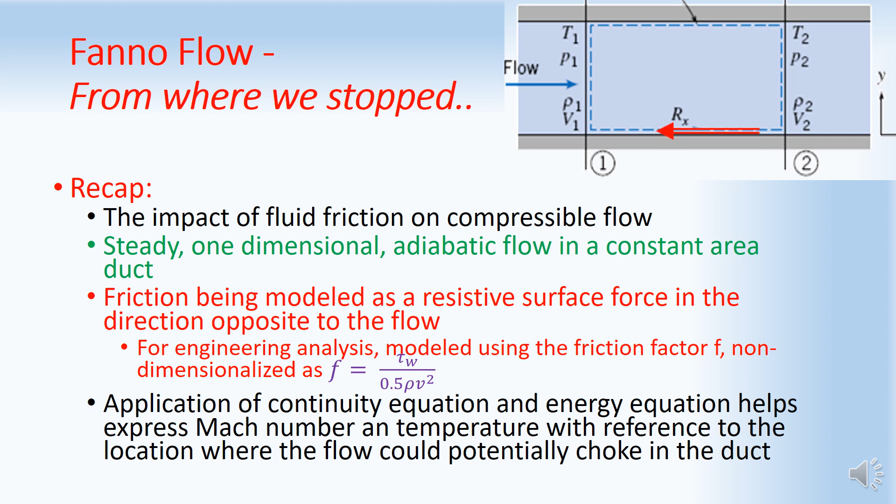We have also seen that the continuity and energy equations can be applied under these conditions, and we can use the conservation of mass and energy to arrive at relations for the ratios of temperature and static pressure. What we first did was to apply the energy equation, because we know that stagnation temperature is constant since we are considering an adiabatic case, and by the application of the energy equation we have derived the relation shown on the top, T2 by T1, that is the ratio of static temperature across the duct at sections 2 and 1.

And we have seen that it can be expressed as 2 plus gamma minus 1 M1 squared divided by 2 plus gamma minus 1 M2 squared. In fact, I guess we wrote that in a slightly different fashion in the class, as 1 plus gamma minus 1 by 2 M1 squared and 1 plus gamma minus 1 by 2 M2 squared, but you can note that it's the same expression.

Similarly, we have combined the energy equation with the continuity equation, and we have got a ratio for static pressure. This derivation also we have done in the class: the ratio of static pressures P2 by P1 is equal to M1 by M2 square root of T2 by T1, and combining the expression for T2 by T1, we can now write P2 by P1 is equal to M1 by M2 multiplied by the square root of the expression that we have for T2 by T1.

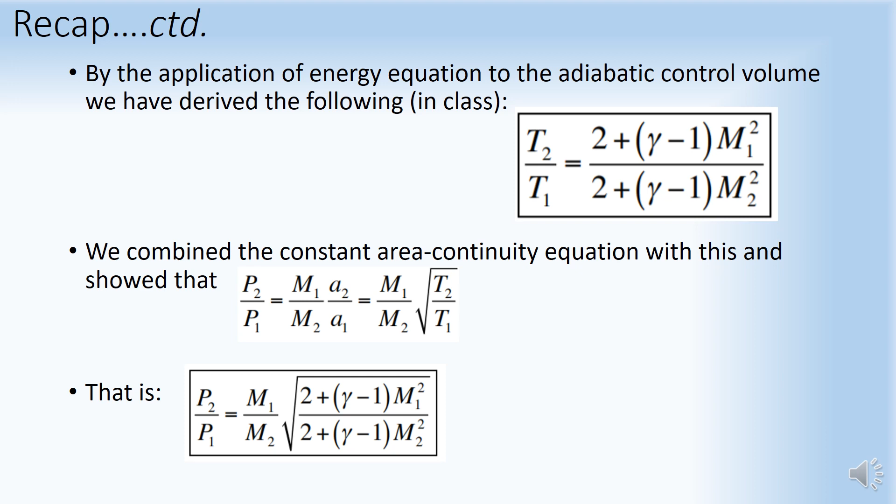We have also seen that, in a similar fashion as we did for Rayleigh flow, the ratios can be written with respect to a sonic reference condition. That is, if the length were long enough, the flow would choke at some point, and at that point, the sonic condition, the Mach number will be equal to 1. In the above expression, if we substitute M2 as 1

and the respective properties are marked by star, then we can write that T by T star is equal to gamma plus 1 divided by 2 plus gamma minus 1 M squared, which comes directly from the equation that we have written earlier. Similarly, a ratio for P by P star, which is equal to 1 by M square root of gamma plus 1 divided by 2 plus gamma minus 1 M squared.

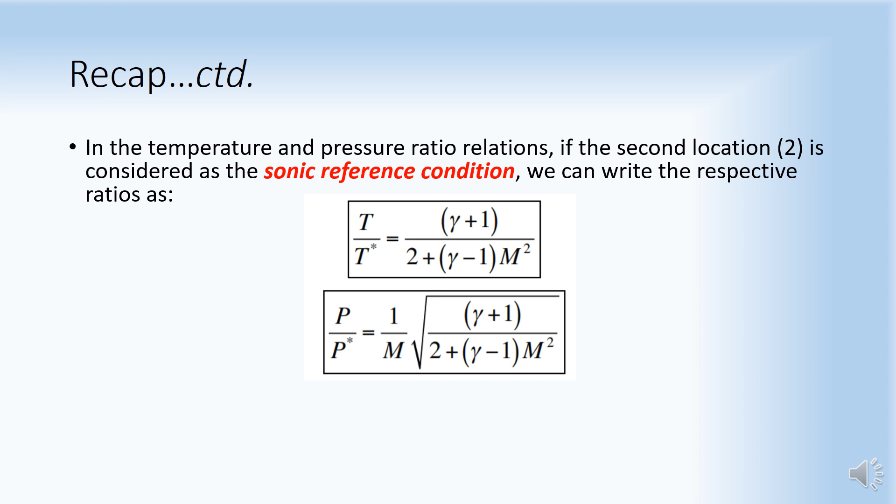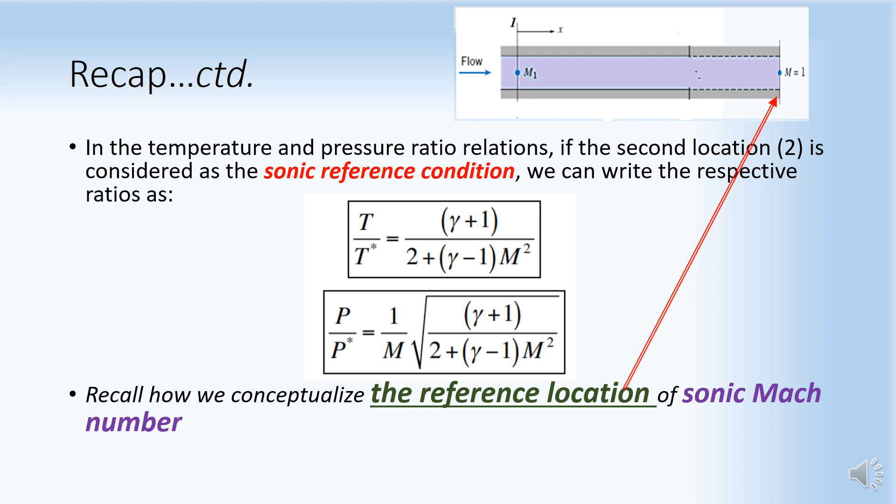So these two relations that we have written here, T by T star and P by P star, are ratios of local static pressure or local static temperature as the case may be to the respective values at the sonic conditions. So we are expressing these as a function of the local Mach number. So this much we have already done in the class, and considered the interpretation of the conceptual extension of the duct to L star. And what I want to highlight here is that this length is also referred to as maximum length, L max. I'll be explaining that more in another slide. So for now I'll just leave this part.

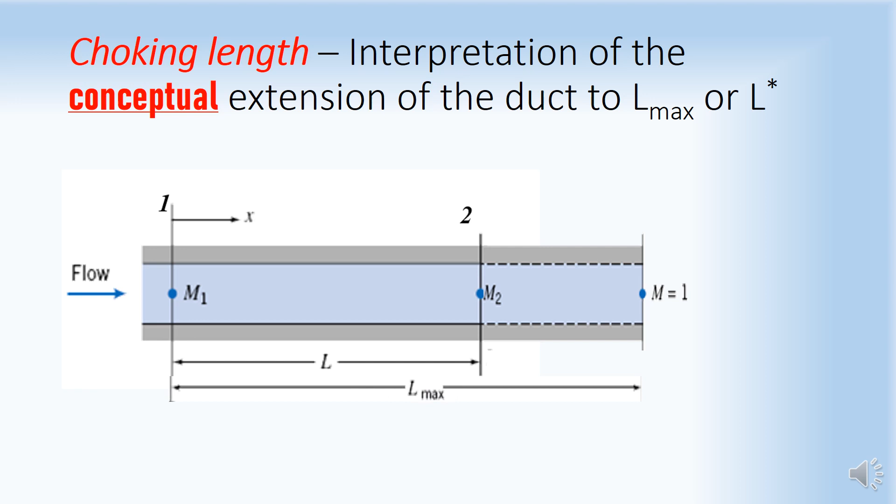We started in the class the application of momentum. So what we discussed so far was continuity and energy equation. We have also attempted application of the momentum equation. We started off with the finite form of momentum equation, the familiar form that we have been using, and we have modeled the surface force as the wall shear multiplied by the peripheral area pi D dl, and for the wall shear, we have it as pi D dl multiplied by half rho v squared into friction factor. And for a differential control volume, we have already written it as dp plus d of rho u squared being equal to minus 4 by D tau w dx.

This 4 by D, I don't remember whether we discussed that in the class, but if you do that yourself, you can see that the 4 by D on the right hand side comes due to the division of the area pi D dl by the cross sectional area pi D squared by 4. The pressure differential on the left hand side, dp etc., acts on the cross sectional area pi D squared by 4, whereas the shear force acts on the peripheral area pi D dl. So when we divide it by the cross sectional area, the term that will be left on the right hand side will be 4 by D, which comes as the ratio of the two areas.

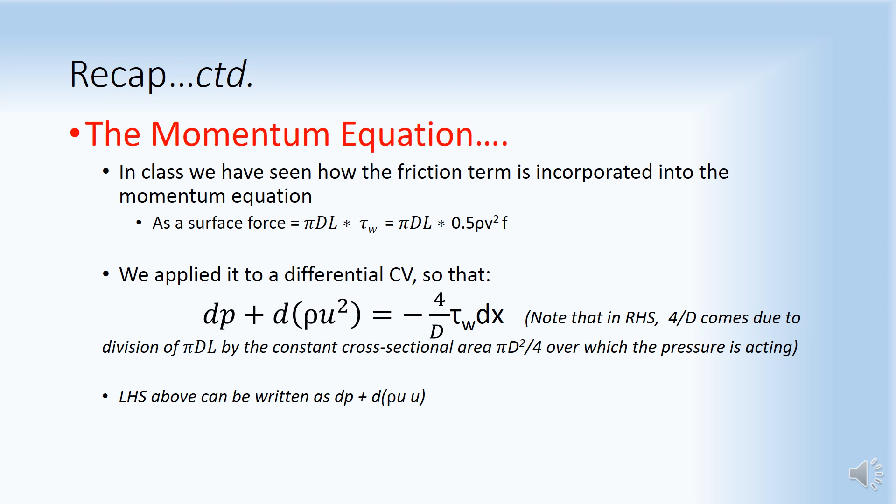Please also note that the left hand side here, dp plus d of rho u squared, can also be written as dp plus d of rho u multiplied by u, rho u being inside the bracket. The convenience of writing like this is when you expand the differential, rho u is, as we know, rho multiplied by velocity. Please note that in these slides I used u as velocity. Please bear with that. In fact, we have been using v for velocity. I missed the notation here, but please remember that we are using here u for velocity, not internal energy. So here rho u is nothing but rho v, which is constant, which means that d of rho u is going to be 0 because of continuity. The expression will simplify to dp plus rho u du is equal to minus 4 by D tau w dx. That's because d of rho u is equal to 0.

So the one which is highlighted here in red fonts is the differential form of momentum equation, and with some manipulation, relating velocity to Mach number, I have not done the entire derivation here. I am just jumping to the final expression. Instead of velocity, if you write Mach number, the whole expression gets converted to 2 of 1 minus M squared by gamma M squared, etc. That long expression that you have in the box.

Again, I apologize for mixing up the two notations u and v. Please be sure that in these slides, nowhere are we referring to internal energy. So wherever you see u, consider it as v. If you want, you can even correct it in your notes. It's v and not u. So don't confuse it with the internal energy. In this whole set of slides, we are not using internal energy at all. So wherever you see u, please take it as the velocity v.

Now, we have this expression marked in the box here, in which on the right hand side you have the all important parameter 4f dx by D, which is the representation of the force caused by friction. In fact, that's a non-dimensional parameter. Strictly speaking, the fluid friction or the wall friction may vary across the length of the duct. Please keep in mind that we are going to apply this across the length of the duct.

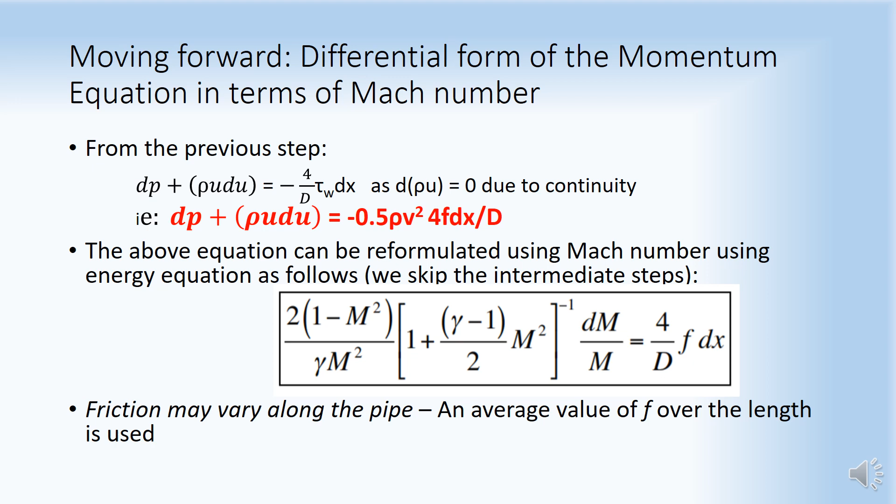In real applications, though fluid friction may vary along the length, it's quite usual to use an average value for f, that is an average friction factor over the length. So usually f will be considered constant and will be represented as an average value for a specified length of the duct.

Now this equation can be integrated, and the integration is usually done with the limits from entry. Keep in mind the flow is entering at some location into the duct and proceeding till the end of the length. Integration is done with the entry location being L equals 0 and the hypothetical choking length as being L star. So x varies from 0 to L star, and M varies from the entry Mach number to the sonic Mach number.

Under these conditions, the integration is also a fairly complex mathematical process. We are skipping that here and just writing the result of the integration as 4fL star by D is equal to a long expression which is in terms of Mach number.

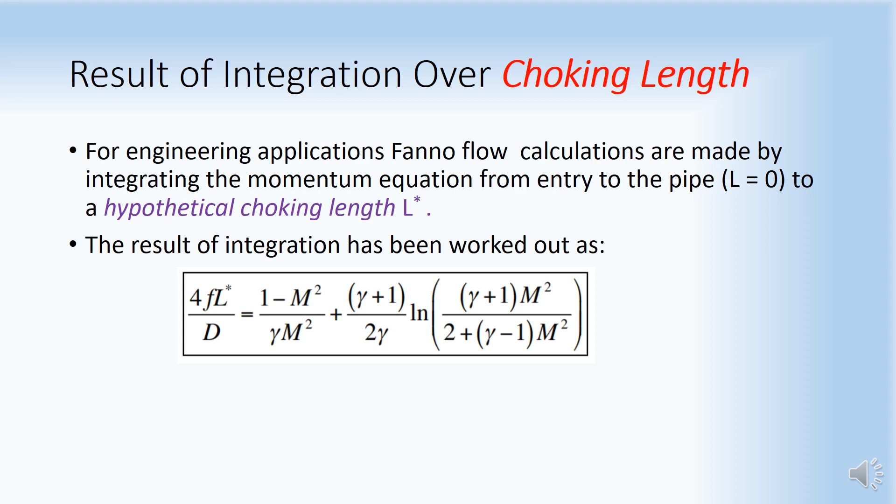So this expression provides us with a tool which can be conveniently used, because these values are tabulated, as we have always seen in gas tables. This expression can be used to calculate Mach number, friction factor, the choking length and the diameter of the duct under the assumptions that we have. We'll get to know the utility of this expression as we proceed further.

Before that, this fact I had emphasized earlier; I'm just re-emphasizing it here. L star, the choking length, is in literature also referred to as L max, the maximum length. The choking length is the maximum length that we can consider for a given set of flow conditions. If it is subsonic flow, that's the maximum length that you can give for a given mass flow rate. That's why sometimes people use the notation of L max.

What I want you to keep in mind is that what we call L star and what you see in the gas tables as L max are the same parameter, the same choking length. In fact, the gas tables that we use, of E. Radhakrishnan, the third edition, use L max. So when you look at the tables, keep in mind that that is nothing but the choking length L star. You can see in the image shown below the explanation for L max, which is actually equal to L star.

Even if our practical analysis is confined to a length from 1 to 2, rather a length L of the pipe, we will still use these relations, which are in terms of L star or L max, which includes the hypothetical extension of the pipe till the choking length. How this kind of hypothetical length is useful in the analysis, we are going to see in the next few slides.

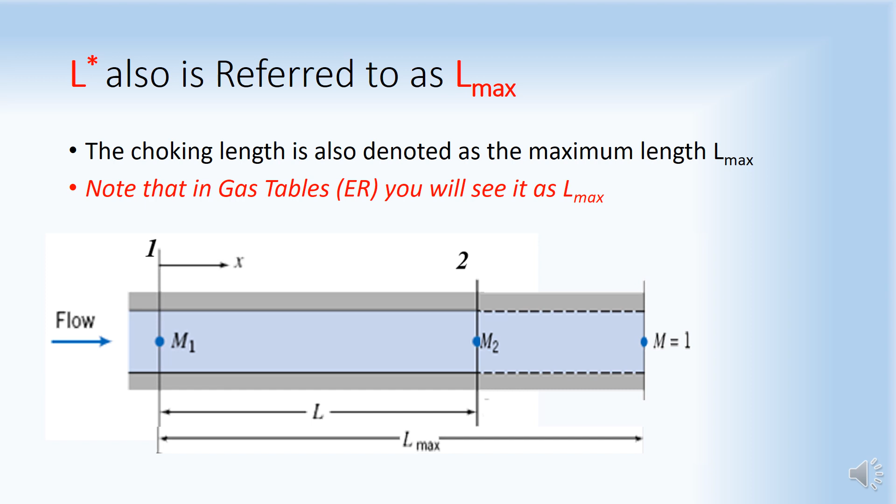Before we go into further analysis, I'll summarize the solution procedure usually adopted in making engineering calculations for Fanno flow conditions. Typically in problems, you consider a given length of a constant area duct, and the exit Mach number is found by relating it to L star and the entry Mach number M1. M1, the Mach number at the entrance to the pipe, will usually be given, and can be used to calculate L1 star based on the expression we have just seen.

Once we know the total length of the pipe, we can also calculate L2 star as L1 star minus L. Now what is L2 star? L2 star is defined the same way as L1 star. L1 star means the length that you have from L1 till the choking section, the choking point.

Similarly, L2 star is the length that you have starting from L2, that is the end of the pipe here, to the choking section. So I again repeat this fact: it doesn't mean that you always have the choking length, but if you were to have a sufficiently long pipe to choke the flow, the length that would result is what we call L max.

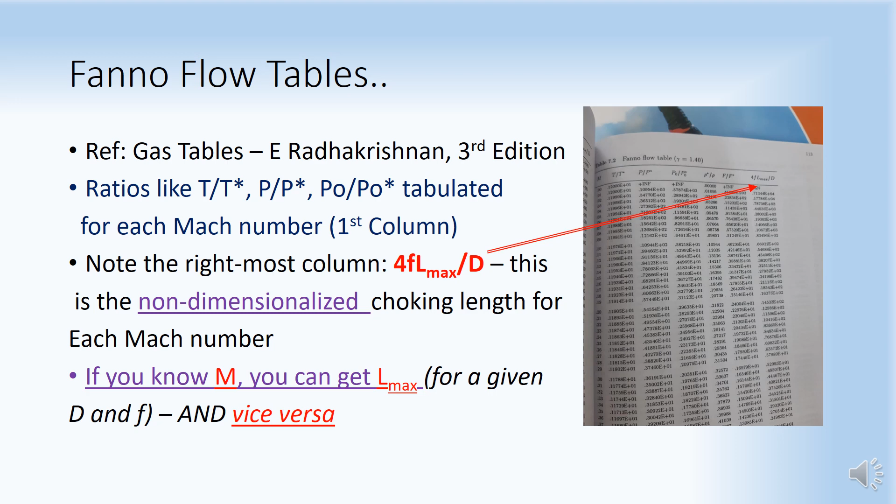Before getting into the numerical example, we will also take a look at how Fanno flow is represented on a TS diagram, which we are familiar with from the discussion of Rayleigh flow. Again, it's a non-isentropic process. The presence of friction renders the process non-isentropic, though we are considering adiabatic flow. So adiabatic flow through a uniform area duct is still irreversible because of friction, and hence it's a non-isentropic process.

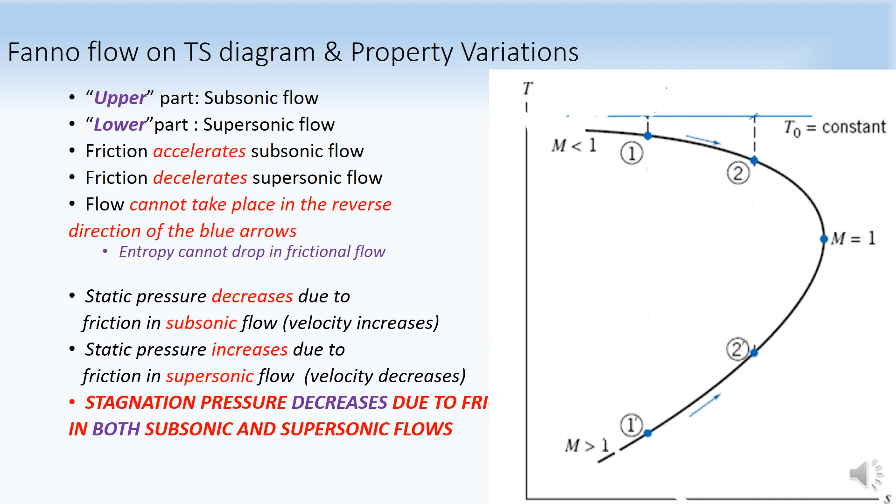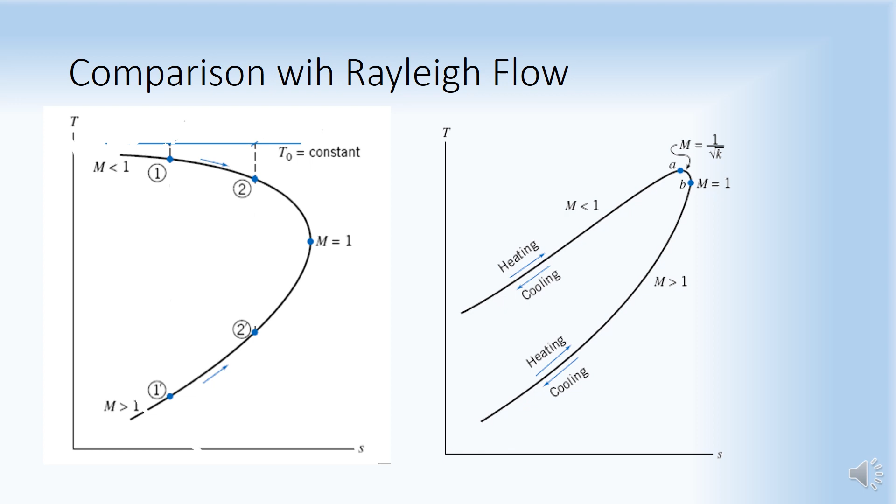Now with that, we consider a numerical problem. Here you have air flowing in an adiabatic pipe, a pipe whose walls are insulated, so there is no heat transfer, no cooling, no heating. Diameter of the pipe is given as 10 centimeters, and its length is specified as 61.2 meters. So a fairly long pipe considering its low diameter. The static pressure and temperature at the inlet to the pipe are specified as 550 kilopascals and 350 Kelvin respectively. The inlet velocity is 75 meters per second, and the pipe has an average friction factor.

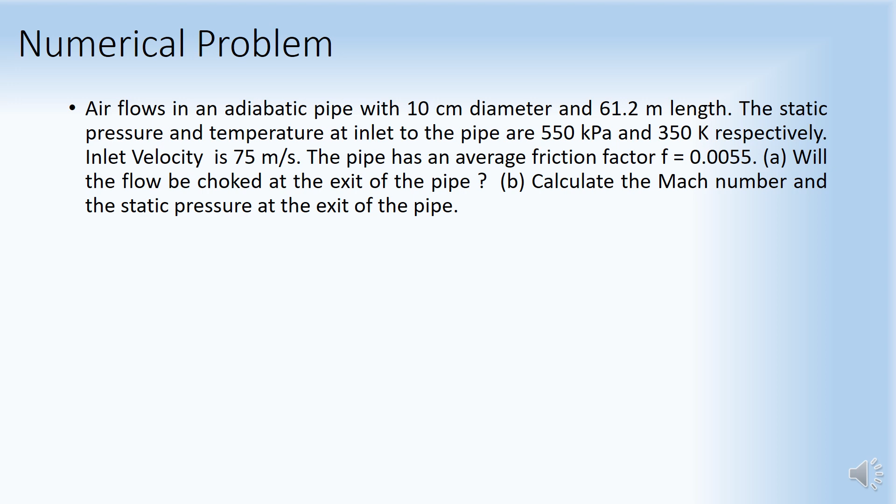Please remember that as we have already seen, though friction may vary across the length, it is quite usual to use an average friction factor which is constant, and here it is given as 0.0055. The two questions: first, we have to determine whether the flow gets choked at the exit of the pipe, and second, calculate the Mach number and the static pressure at the exit of the pipe. I'm just repeating this slide which we have discussed already as the solution procedure.

As I mentioned in that part of the presentation, typically Mach number 2, that is the Mach number at the exit section, can be found by determining L star, that is the choking length L star or L max, based on the inlet Mach number M1. We have seen the gas tables already. M1 will help us determine L1 star because F and D are already provided. We also know the actual length of the pipe, so L is provided as 61.2.

L1 star we can find out as a function of M1, and then using this expression you can see L2 star is L1 star minus L. That comes obviously from the geometry of the figure. In the expression I have written it using star, but here it is L max in the image. Both are the same. So L2 max is L1 max minus L. Which means that if you know L and L1 star, you can calculate L2 star. Once you know L2 star, you can go back to the table and get the value of M2. So that's how you determine the exit Mach number.

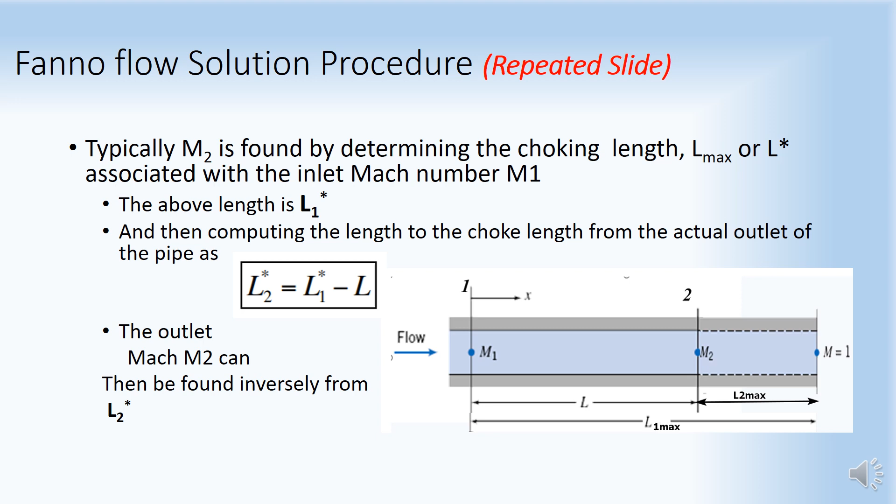Coming back to the problem, first we determine the entry Mach number. The inlet velocity is given as 75 meters per second, and inlet temperature is given, so we can readily get M1 as V1 by square root of gamma RT1 as 0.2. So the inlet Mach number is 0.2. Now we get into the gas tables. We can see that corresponding to 0.2, the 4FL max by D parameter is around 14.533.

So from that we can calculate L max, which is equal to L star, because we know F, we know D. So from 4FL max by D we can substitute these values and get the value of L star, that is the choking length corresponding to the entry Mach number of 0.2. We get it as 66.04 meters. I guess I missed out the dimension there.

66.04 meter, which means that corresponding to the inlet conditions of 0.2, you need a pipe as long as 66.04 meter so that you can reach the choking length. Whereas here the given length is 61.2 meter, which means that the flow is not choked at the exit of the pipe, because the real exit, the physical exit, is at 61.2, whereas choking is at 66.04. So since the duct is not long enough, choking does not happen at the exit of the given section of the pipe. So that answers the first part.